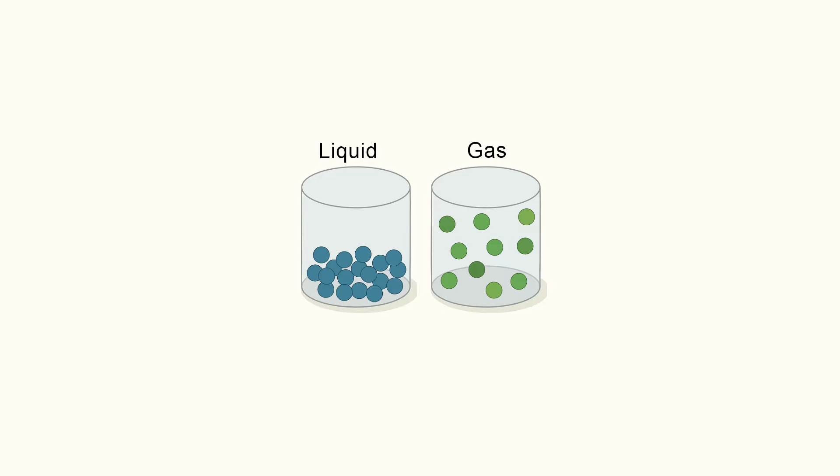A fluid is any substance that flows or conforms to the outline of a container. Both liquids and gases are fluids that follow many of the same rules. However, for all practical purposes, liquids are considered incompressible, while gases are compressible.

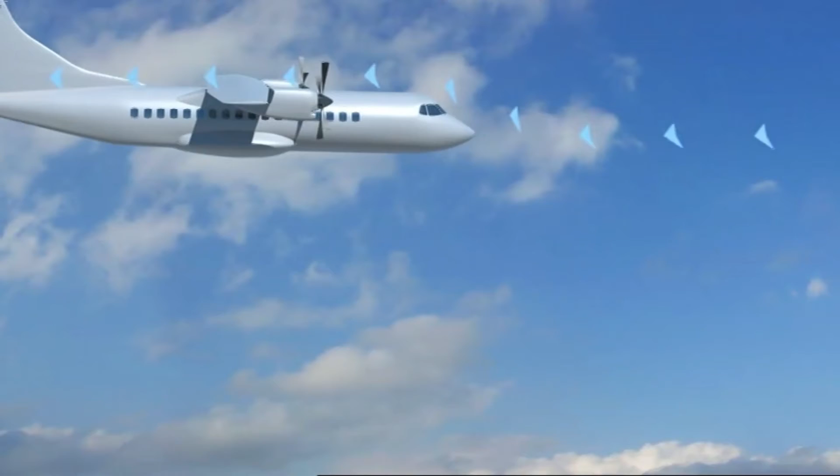Much of the science of flight is based on the principles of fluid mechanics. For example, the air that supports an aircraft in flight and the liquid that flows in hydraulic systems both transmit force through fluid mechanics. A solid body submerged in a liquid or a gas weighs less than when weighed in free space.

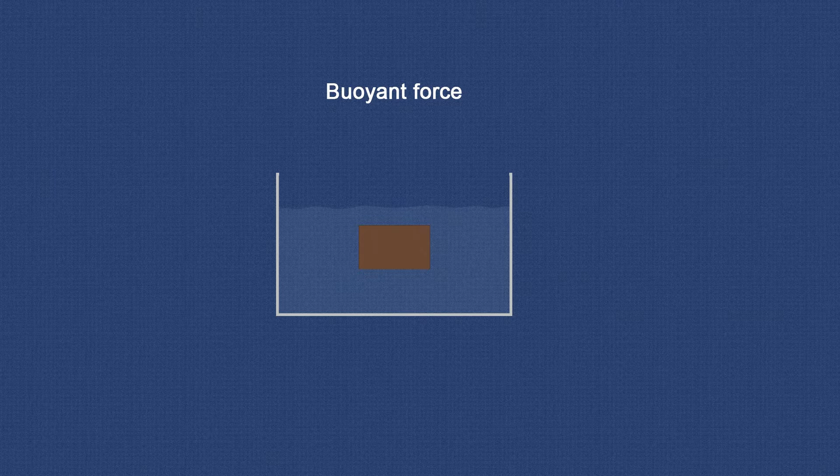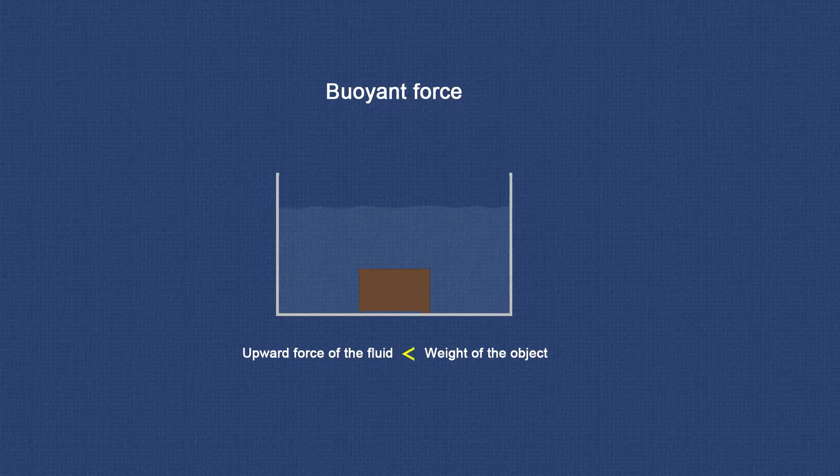This is because of the upward force, called buoyant force, which any fluid exerts on a body submerged in it. An object will float if this upward force of the fluid is greater than the weight of the object. Objects denser than the fluid, even though they sink readily, appear to lose a part of their weight when submerged. A person can lift a larger weight underwater than they can possibly lift in the air.

The overflow can is filled to the spout with water. The heavy metal cube is first weighed in still air and weighs 10 pounds. It is then weighed while completely submerged in the water and it weighs 3 pounds. The difference between the two weights is the buoyant force of the water.

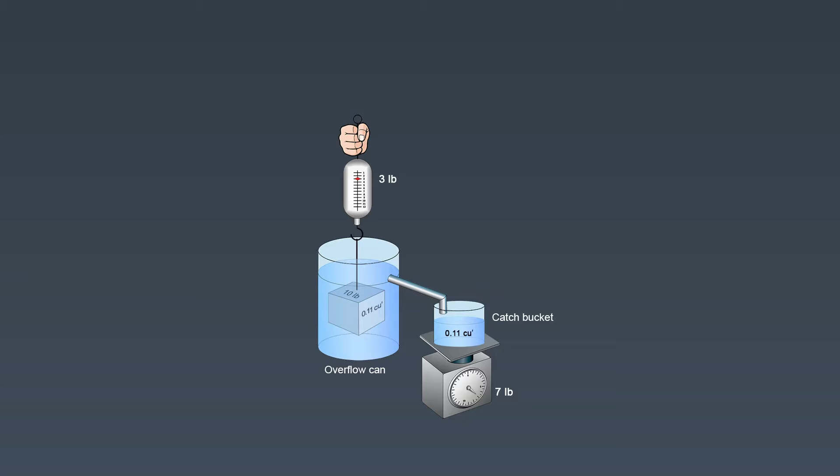As the cube is lowered into the overflow can, the water is caught in the catch bucket. The volume of water which overflows equals the volume of the cube. The volume of irregular-shaped objects can also be measured by using this method.

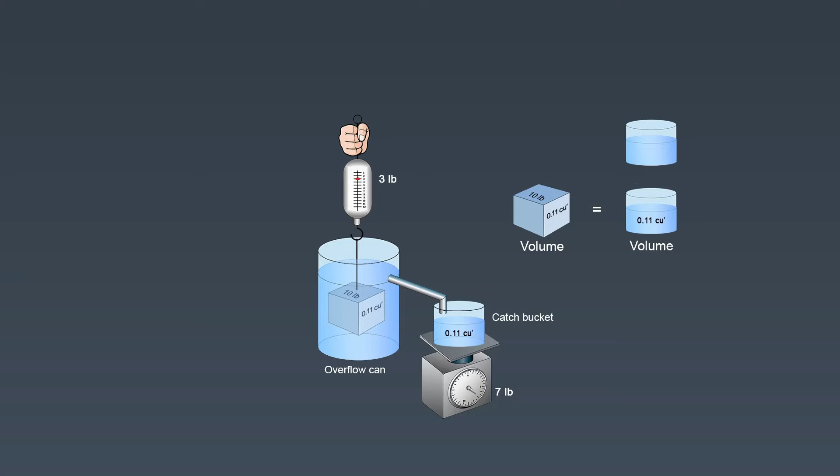If this experiment is performed carefully, the weight of the water displaced by the metal cube exactly equals the buoyant force of the water, which the scale shows to be 7 pounds. Archimedes performed similar experiments. As a result, he discovered that the buoyant force which a fluid exerts upon a submerged body is equal to the weight of the fluid the body displaces.

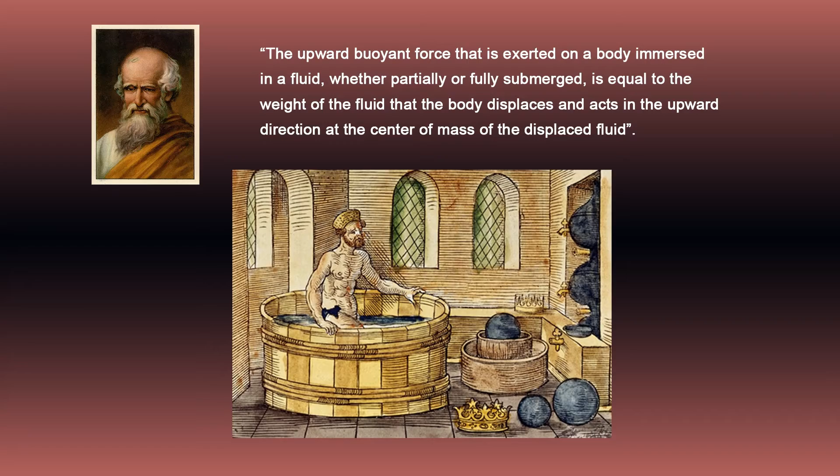This statement is referred to as Archimedes' principle. This principle applies to all fluids, gases as well as liquids. Just as water exerts a buoyant force on submerged objects, air exerts a buoyant force on objects submerged in it.

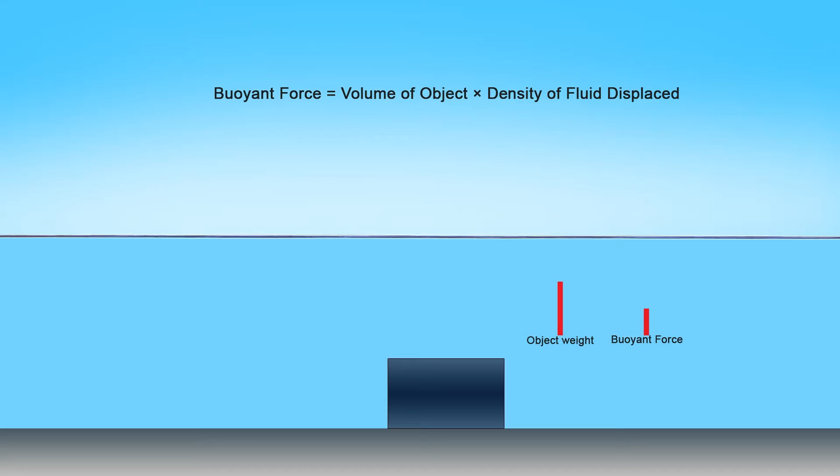Example: a 10 cubic feet object weighing 700 pounds is placed in pure water. Will the object float? If the object sinks, what is its measurable weight in the submerged condition? If the object floats, how many cubic feet of its volume is below the water line?

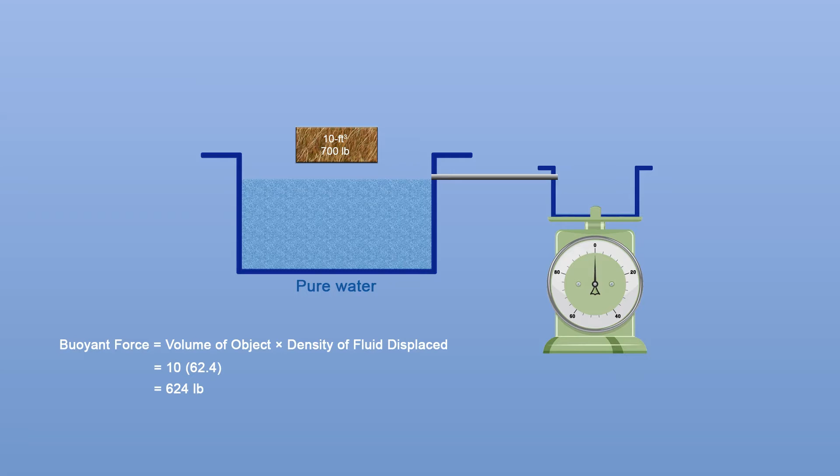The object will sink because the buoyant force is less than the object weighs. The difference between the buoyant force and the object's weight will be its measurable weight, or 76 pounds.

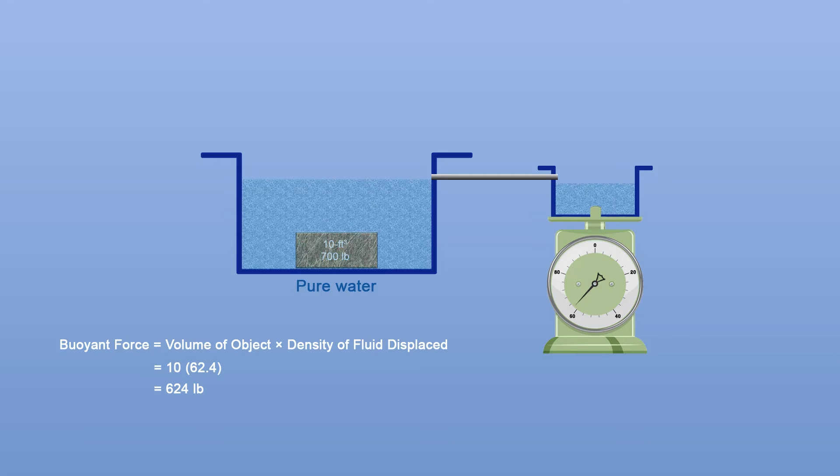Two good examples of buoyancy are a helium-filled airship and a seaplane on floats. An airship is able to float in the atmosphere and a seaplane is able to float on water. That means both have more buoyant force than weight.

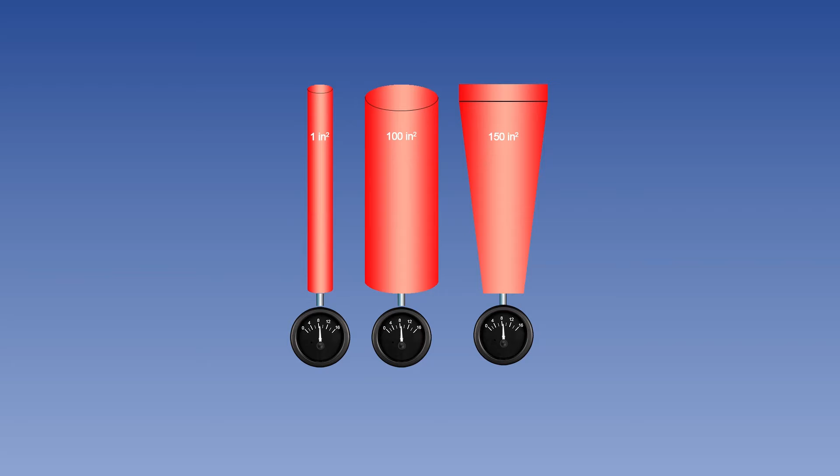The pressure exerted on the bottom of a container by a liquid is determined by the height of the liquid and not by the shape of the container. Three different shapes and sizes of containers are full of colored water. Even though they are different shapes and have different volumes of liquid, each one has a height of 231 inches. Each one would exert a pressure on the bottom of 8.34 psi because of this height.

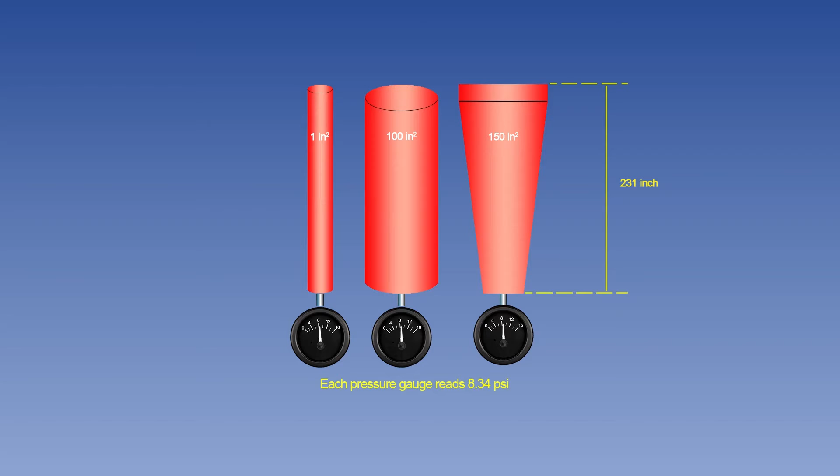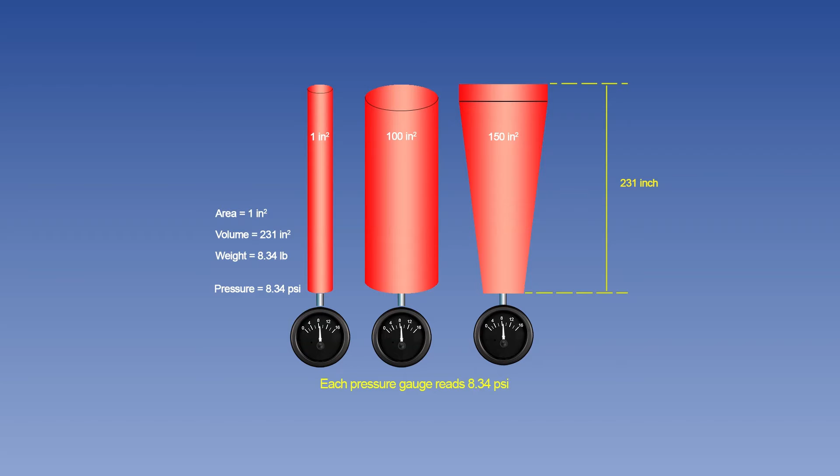The container on the left, with a surface area of 1 square inch, contains a volume of 231 cubic inches. 1 gallon of water weighs 8.34 pounds, which is why the pressure on the bottom is 8.34 psi. If the pressure was measured halfway down, it would be half of 8.34, or 4.17 psi.

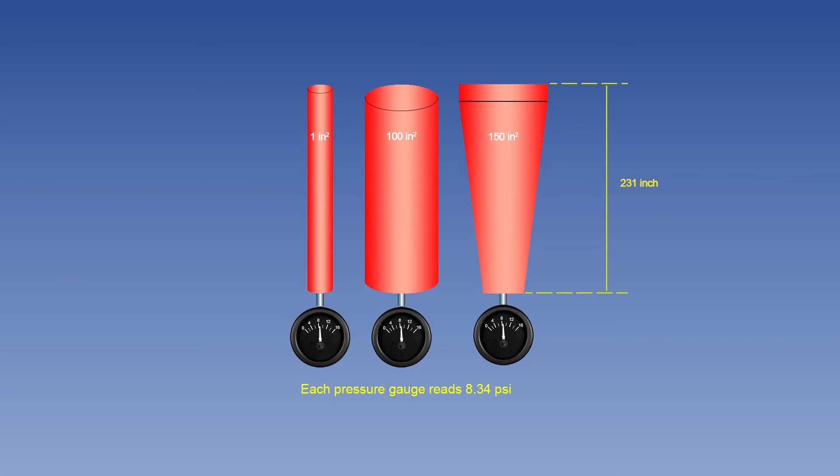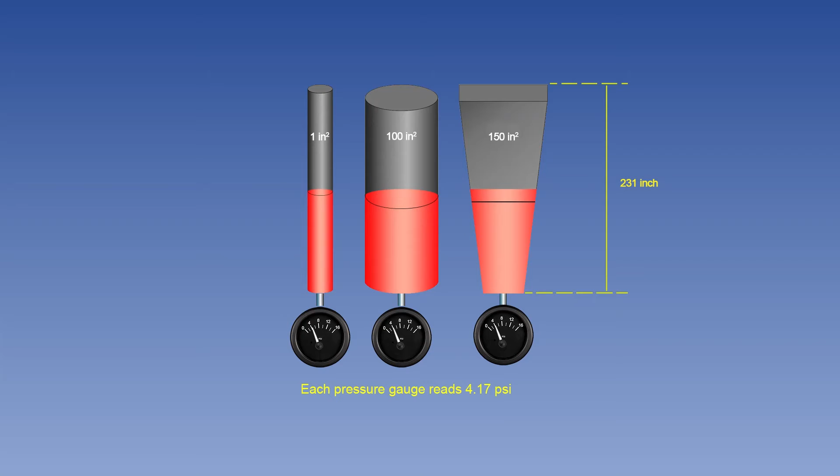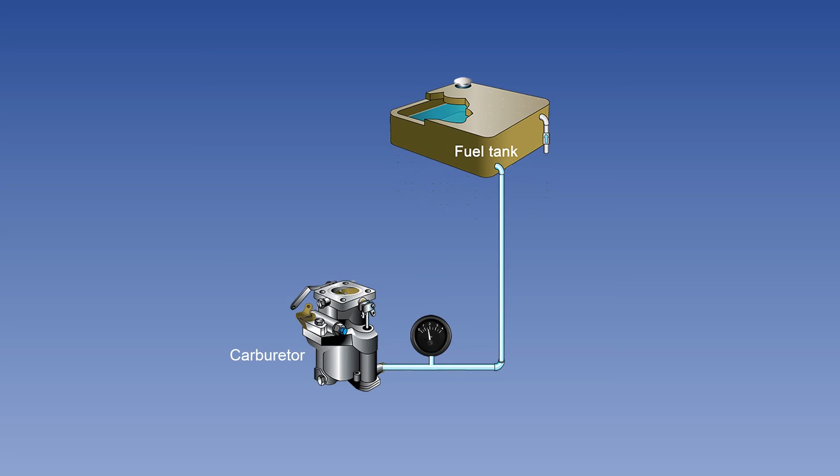In other words, the pressure is adjustable by varying the height of the column. Pressure based on the column height of a fluid is known as static pressure. With liquids, such as gasoline, it is sometimes referred to as a head of pressure. For example, if a carburetor needs 2 psi supplied to its inlet, or head of pressure, this could be accomplished by having the fuel tank positioned the appropriate number of inches higher than the carburetor.

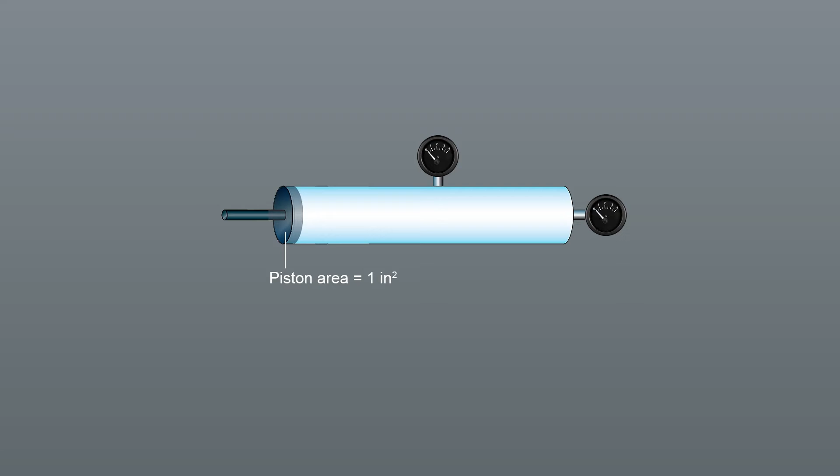Pascal's law explains that when pressure is applied to a confined liquid, the liquid exerts an equal pressure at right angles to the container that encloses it. For example, assume a cylinder is filled with a liquid and fitted with a 1 square inch piston. When a force of 1 pound is applied to the piston, the resulting pressure of the confined liquid is 1 pound per square inch everywhere in the container.

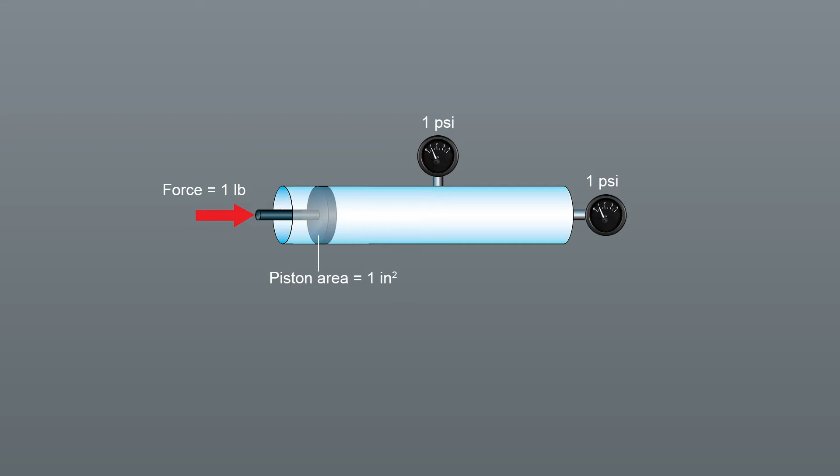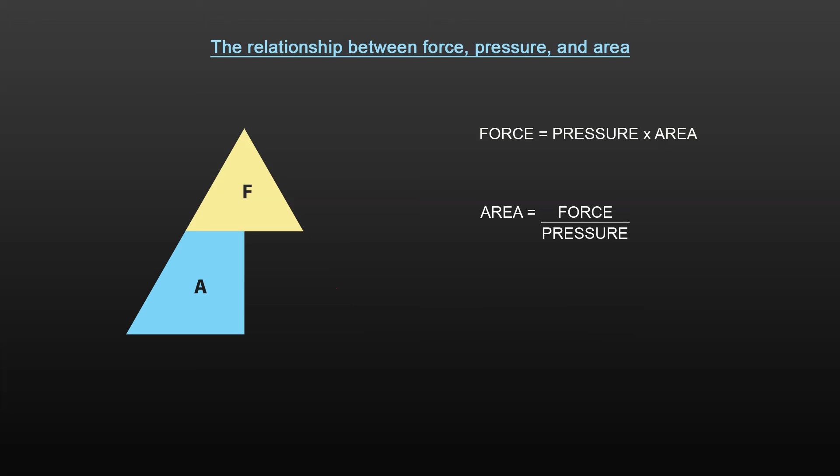You can find the amount of force produced by a hydraulic piston by multiplying the area of the piston by the pressure exerted by the fluid. An easy and convenient way to remember the formulas for Pascal's law, and the relationship between the variables, is with the triangle. If the variable we want to solve for is covered up, the position of the remaining two variables shows the proper math relationship.

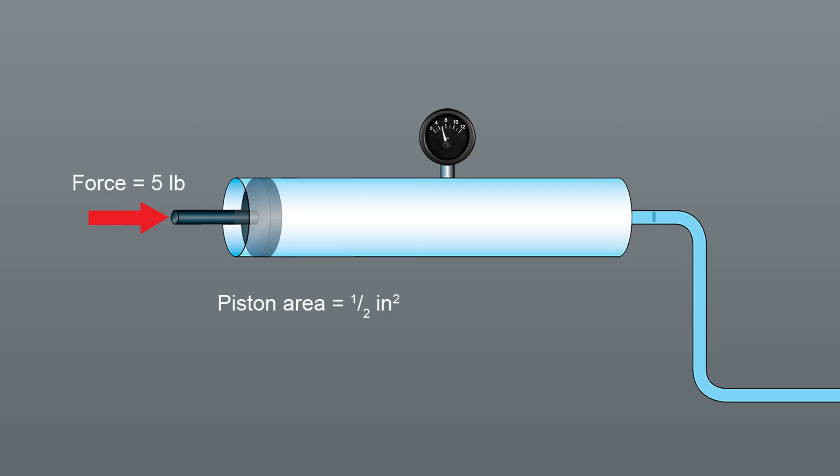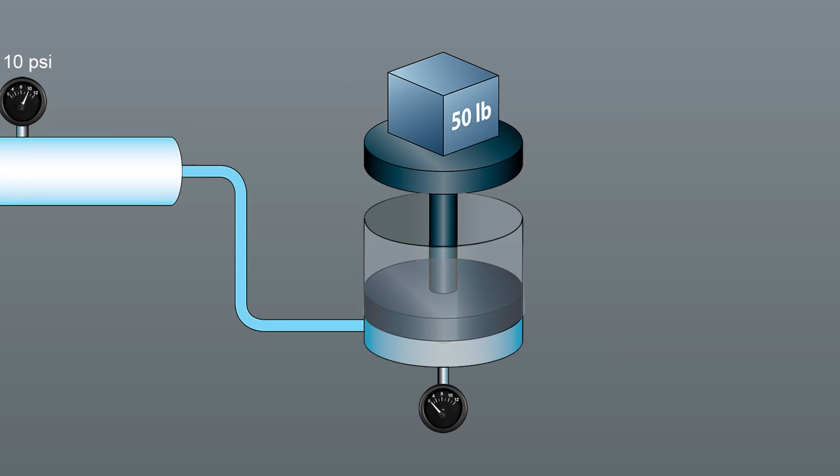This hydraulic system is a little more complex than the previous one. The input force of 5 pounds is acting on a 0.5 square inch piston, creating a pressure of 10 psi. The input cylinder and piston is connected to a second cylinder, which contains a 5 square inch piston. The pressure of 10 psi created by the input piston pushes on the piston in the second cylinder, creating an output force of 50 pounds.

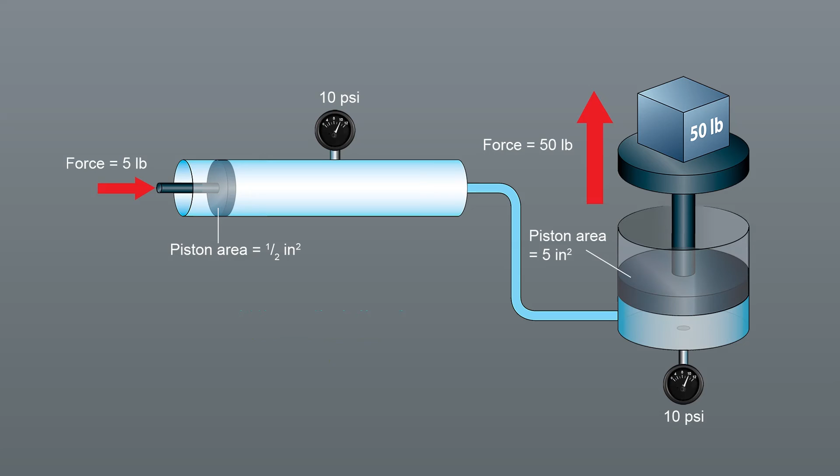Often, the purpose of a hydraulic system is to generate a large output force, with the input force being much less. The input force is 5 pounds and the output force is 50 pounds, or 10 times greater. The relationship between the output force and the input force is known as mechanical advantage. The mechanical advantage would be 50 divided by 5, or 10. The formulas can be used to calculate mechanical advantages.

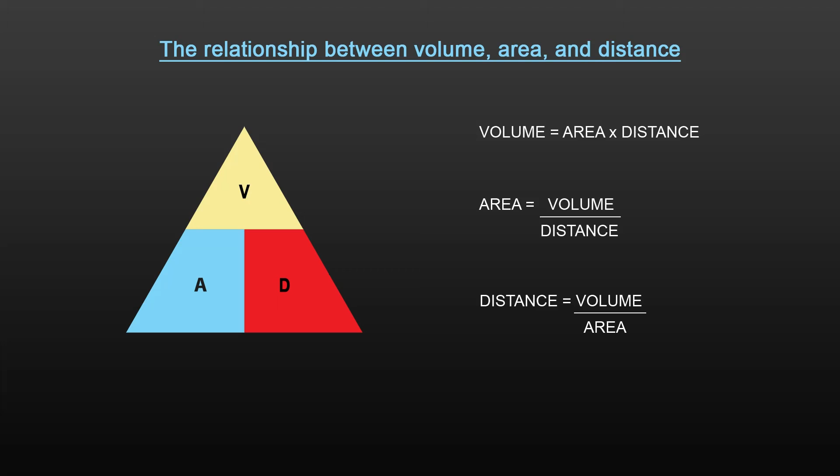When gaining mechanical advantage this way, it is important to note that the pistons do not move the same distance. In the previous example, when the small piston moves inward 5 inches, it displaces 2.5 cubic inches of fluid. When this is spread out over the 5 square inches of the larger piston, it only moves 1/2 inch. The formula illustrates the relationship between the piston area and the distance moved in a simple two-piston hydraulic system. This formula shows that the volume in is equal to the volume out.

Part of understanding Pascal's law and hydraulics involves utilizing formulas and recognizing the relationship between the individual variables. Before the numbers are plugged into the formulas, it is often possible to analyze the variables in the system and come to a realization about what is happening.